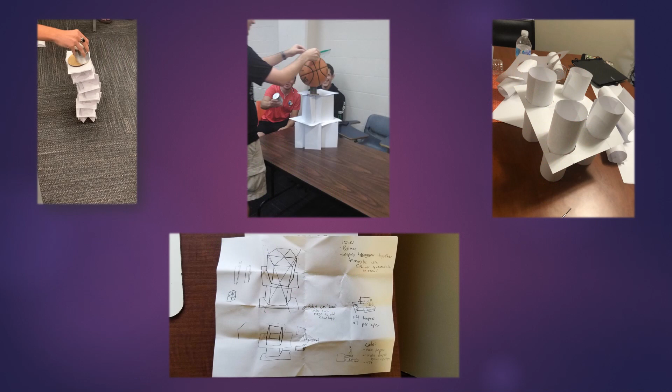To come up with our design, we started by figuring out what kind of paper tower would be the most structurally sound. After testing different shapes, we determined that cylinders held up the best against different loads of weight when compared to other shapes like triangles and squares.

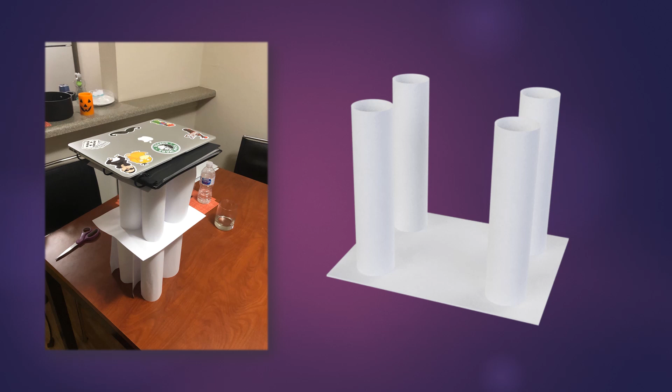We also knew that the tower design would need to be manufactured quickly and feasibly. As a result, a simplistic design using a minimal paper per layer ratio was needed. From this, we determined the design consisting of 4 cylinders layered with a horizontal sheet to be the best for our paper tower. With our ambitions and a solid plan in sight, we started the process of designing our robot.

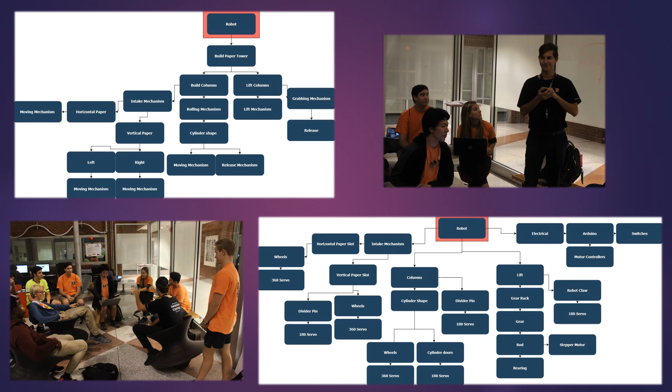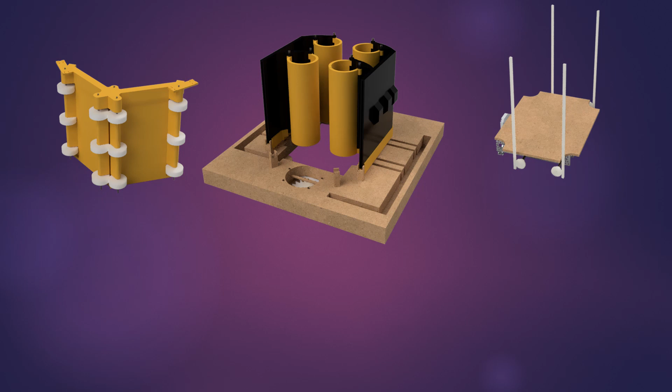First, we developed a function and component decomposition to create a layout of what our robot would need. From this, we determined that our robot would require 3 main mechanisms. First, it would need an intake to take the paper into the robot. It would then need a mechanism to turn the sheets of paper into cylinders. Lastly, due to the height constraint, it would need a lift in order to raise the tower above the robot. We then split up into 4 sub-teams: the intake team, column team, lift team, and programming electronics team.

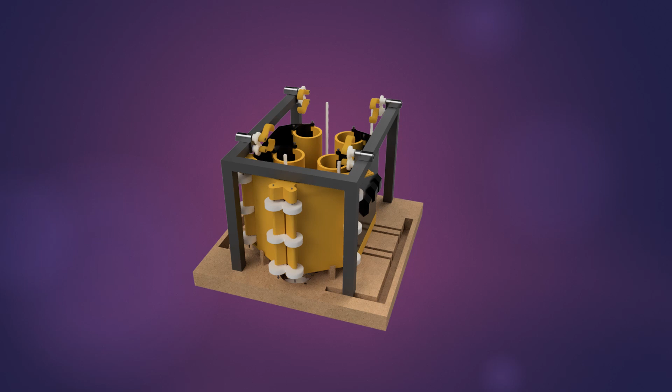Our creatively named teams first created basic sketches of components needed, before developing computer-aided designs using Fusion 360 to further model the mechanisms. Afterwards, we started the production of prototypes for each of these.

Now we're going to go into more detail on the specific mechanisms, starting with the intake team. I, John B., am representing the intake team.

Our design feeds paper one at a time into a single opening and then transports the paper to both column systems. An intake with a single entrance makes the input of paper by a human more efficient, as well as staying within the volumetric restrictions.

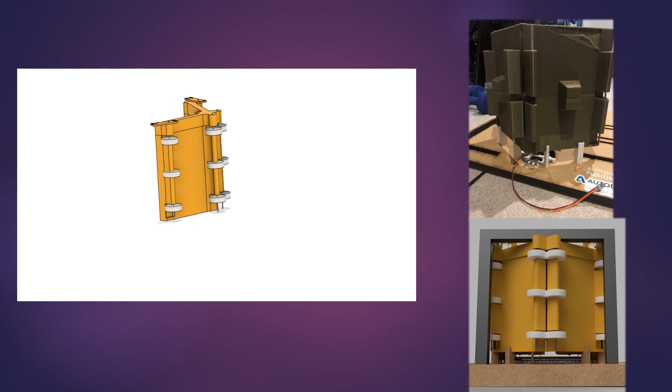The team decided to create this V-shaped design with 4 rubber flex wheels which can drive the paper through both channels. An actuated dispensing system sends the paper to the left or right columns.

I'm Jack, representing the column team. The column team was tasked with moving the paper fed from the intake system to its final position on top of the lift platform. We designed a system of channels using rubber flex wheels to push the paper forward and actuators to move the paper into the rollers.

The rollers are composed of 2 circular doors that open once the paper column is finished rolling and allow the entire column mechanism to be moved outward to clear space for the lift system. The base of the robot is also included in this design and uses a gear and rack system to slide the column mechanism outward.

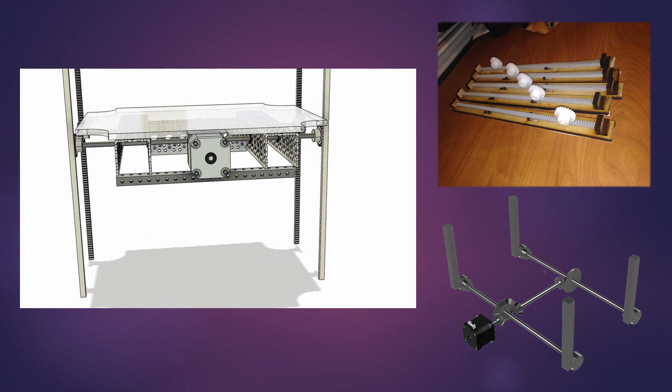Hello, I, Ricardo, am representing the lift team. The final design of the lift was no easy task. After countless iterations and various concepts and ideas, we settled on a driveline-inspired lift. Powered by a powerful NEMA 17 motor, we ran 4 gears up 4 racks.

The idea was to assemble each layer of the tower on top of it, and then run the lift frequently up and down, adding layer by layer, and then finally resting to hold up the weight of the entire tower.

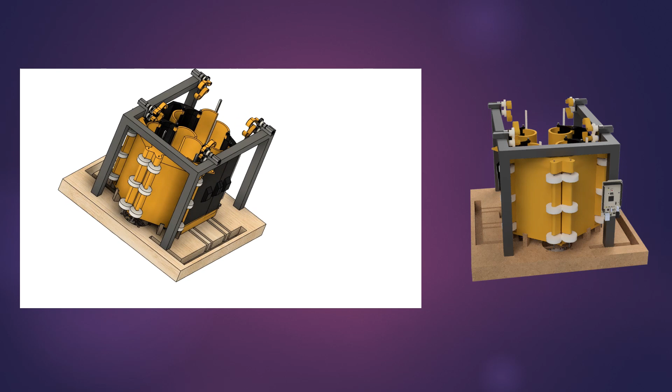I'm Kurt, and I'm representing our programming and electrical team. We chose to use an Arduino to control the robot, and to simplify programming, we abstracted all the robot's physical components into an object-oriented API. This lets us keep our programming compact and easy to read, which aids collaboration between team members.

The robot has multiple light sensors distributed throughout it, which help it keep track of where each paper is, so the rollers and elevators can activate when needed, saving us time on each run.

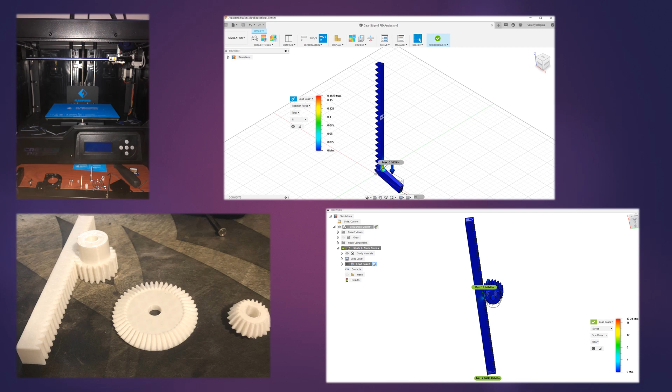Due to many of our parts being manufactured through 3D printing, there was an incentive for us to do as much of our testing and redesign digitally. Luckily, utilizing Fusion 360's advanced simulation tools, our team was able to test stresses on our design and determine if it could withstand them.

This was especially useful with the lift mechanism, which had to hold up to 15 pounds during the weight round. Fusion made it easy for us to conduct our simulations and make changes and redesigns in the same software. Throughout our design process, we found that it was most beneficial to anticipate possible problems and develop solutions preemptively.

One such problem was the issue of paper losing its cylindrical shape, which we remedied by designing a paper stapler to fasten the paper cylinders to a fixed radius.

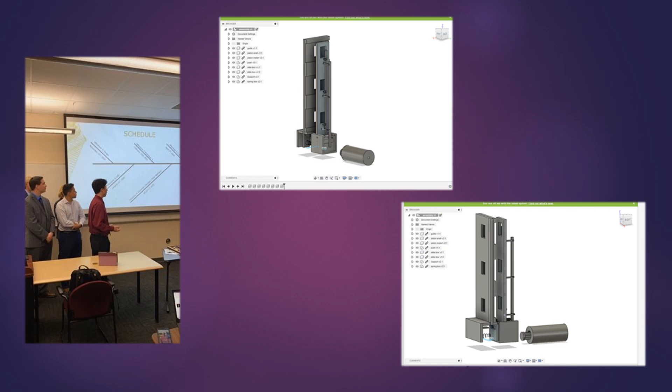We also developed plans to create a protective roof over the entire robot to protect it from any damage caused by falling weights. Though we were unable to complete the entire robot, many of its systems and parts were able to be tested independently. Our tower itself would have taken an estimated 2.5 minutes to be constructed to a height of 1.5 meters.

Throughout early trials, we also found that our tower design could hold at least 10 pounds of weight. Throughout our manufacturing process, we tested the movement of the paper through our mechanisms and made adjustments according to how smoothly the paper went through the channels.

How tight to roll the paper columns was also a point of contention within our team, and our trials found that rolling the paper tightly and allowing it to spread out increased the contact between the columns and the horizontal paper layers, which allowed for greater weight to be held over a greater surface area.

And that's our project. While we weren't able to finish our final product due to the COVID-19 pandemic, our professional design process and use of CAD software earned us the sponsorship from Autodesk and allowed us to create an effective design. Everyone here in the SDC Gold Team learned a lot along the way and had a ton of fun doing so as we charged on.